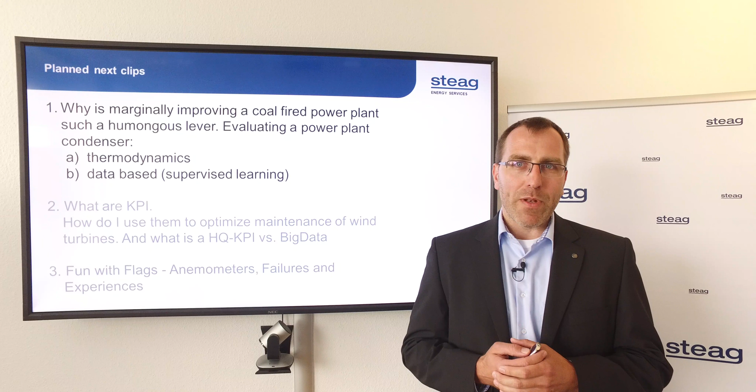Funny thing is, from the first episode, most feedback that I got was about the German humor. So I was trying to do some homework, was looking up some stuff, but there was nothing funny to share with you here right now. So the best one that I found was this one. Finally, the meaning behind the German flag. And that is a solution there. And that's the best joke that I found for you.

Now let's talk about the condenser. This is a small one. What is a condenser? It's a part in the power plant where the steam is condensated, so it can be reused for the cycle. We will see more data soon.

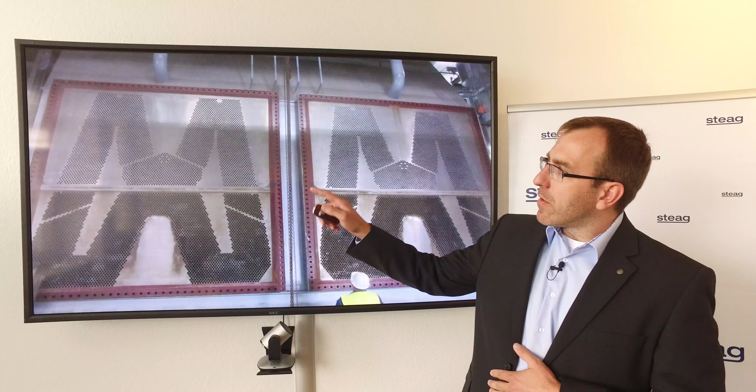So from the outside it looks like this. A bigger one from the inside looks like this. Those are holes, I hope you can see it here. The cold water goes through the holes and the steam comes from the top part. It looks like this. This is an animation that you can see on the STEAG website, where we can give you the link in the description below.

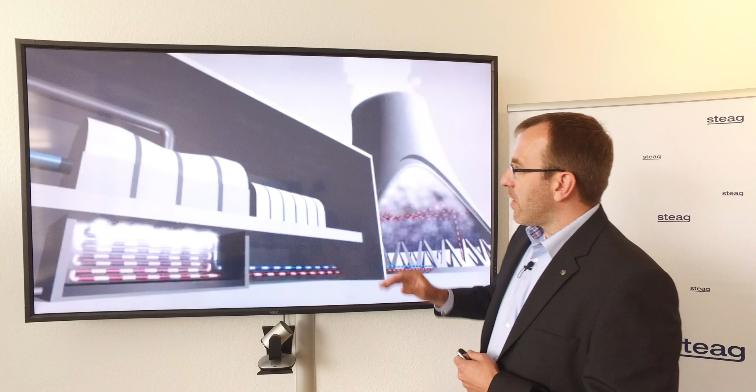So in the boiler part, we have the coal, we have the gas, whatever the power plant uses to make the steam in the piping system. Then the steam goes to the turbine system, high pressure, intermediate pressure and low pressure part. And finally the steam has to be condensated to go back to the cycle. Here we have the cold pipes. Why are they cold? They are cold because we have the cooling tower. And here a little bit of the water is evaporated, everything else is going back a little bit cooler. So we have steam, we have cold pipes, we have water, and that's it.

Why is it such an important part of the power plant? Yeah, because it has a huge impact on the efficiency of the overall plant, and it's difficult to monitor in the real world. So let's get started.

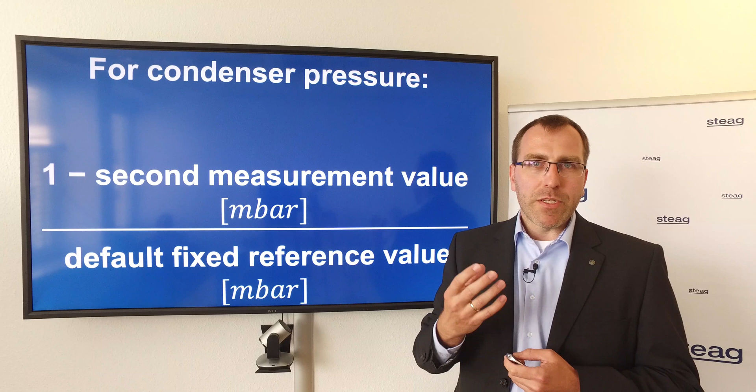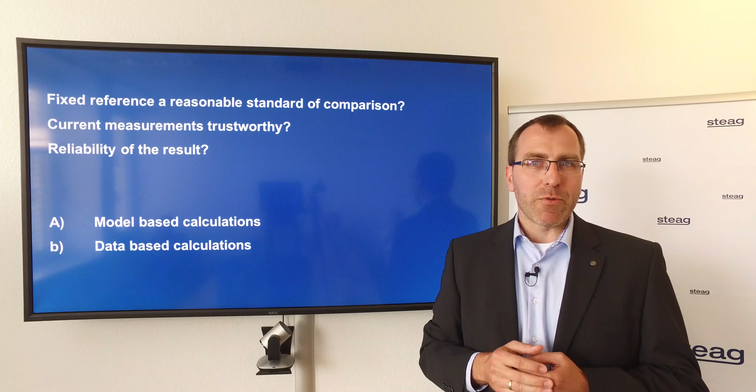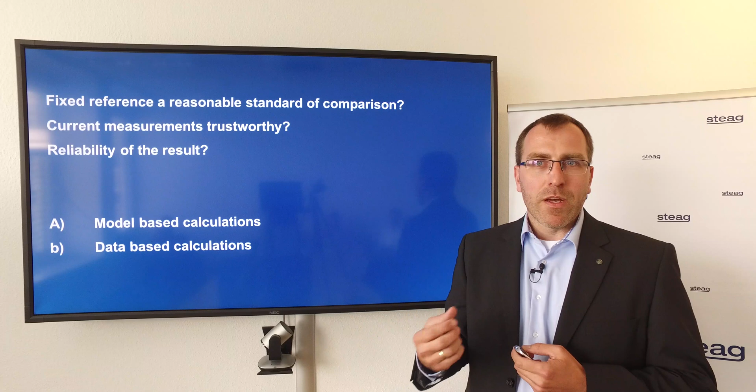Questions come up such as, why is that reference value a good comparison there? Is the measurement that I chose, is it trustworthy? And what is the reliability of the result in general? So now we have to go a little bit more into the detail. I love that, so let's do that now.

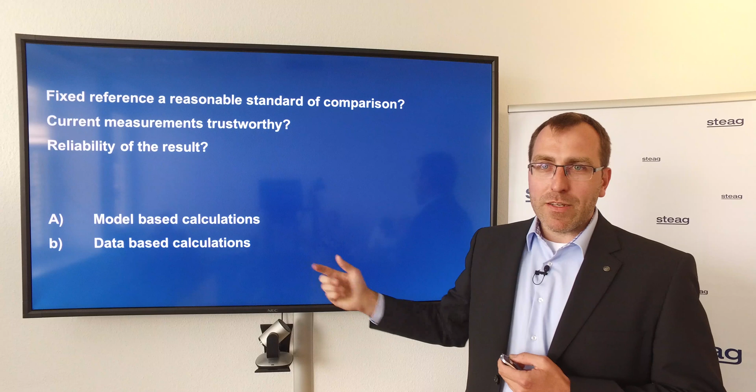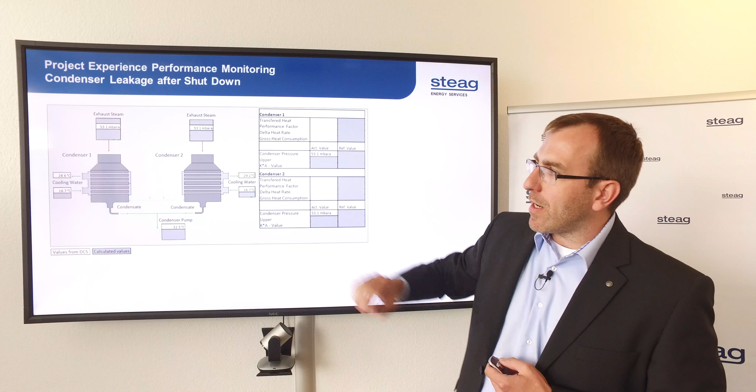First step, thermodynamical approach, and in the second part we have the data-based approach as well. So that is a view from our system. We have a picture of the kind here, and what we see in the white boxes are measurements taken from the control system. So right now we have everything on the screen, but it's very difficult to find out what it actually wants to tell us.

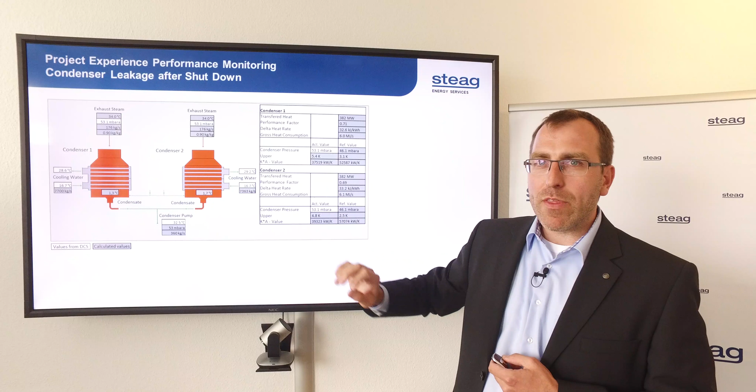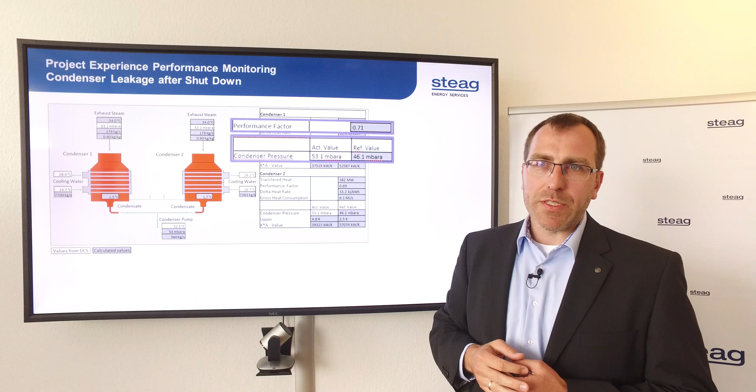Now we add the results from such a system, and biggest part is the color scheme. So red means something is wrong there. It's very easy to spot. And all those gray values are results from calculations, and they show us the context of the situation. We see performance factor, we see the condenser pressure as it is right now, and a current reference value what we should compare to. So that's even lower than the value that we chose in the beginning. The other one as well.

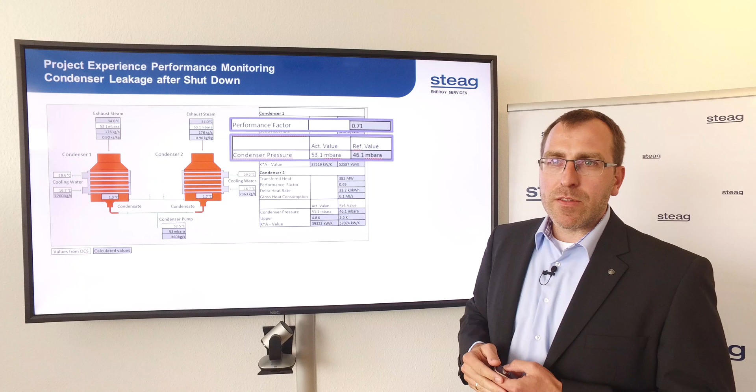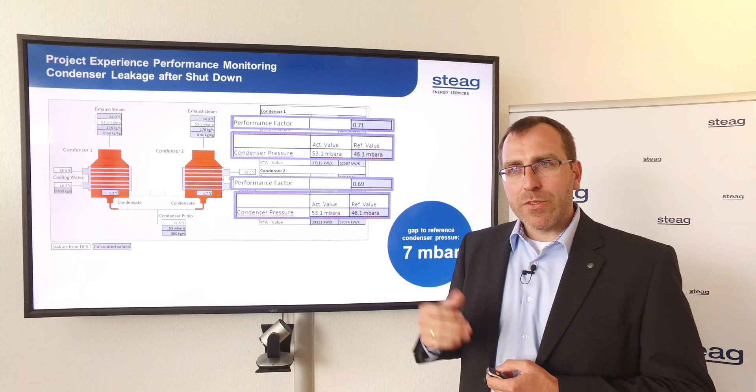So we have a small gap here of 7 millibars, and that is difficult to spot because measurements are fluctuating all the time anyways. With such a system it was easy to spot it immediately after a shutdown and a regular startup again. There was a small change, as we saw.

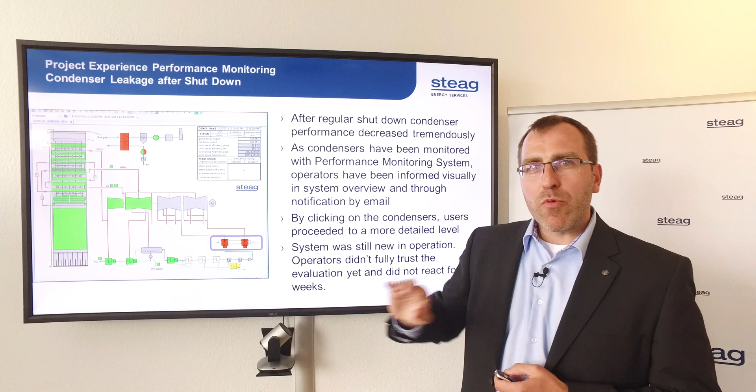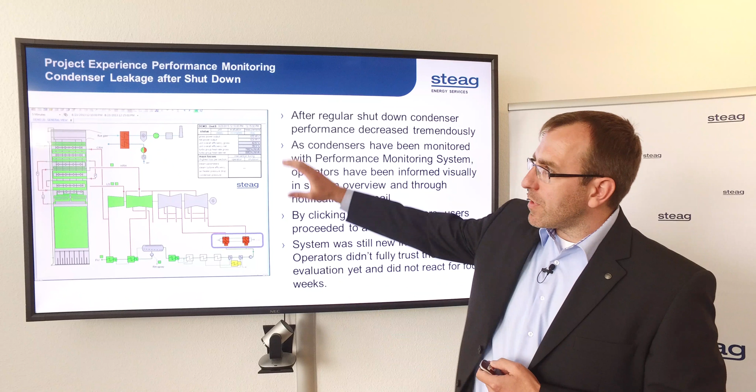Here was the picture, but the problem was it was a new system. It was not completely established yet, so the people saw it, but they didn't really completely react at this point in time. So the system gives the overview, and if you want to go into detail, you just click on it and you see the screen that we saw before.

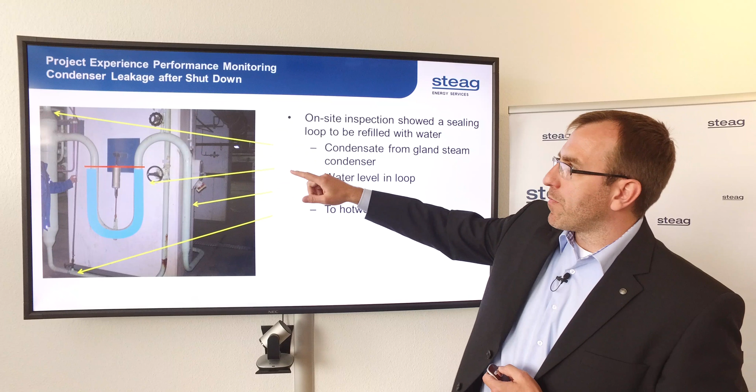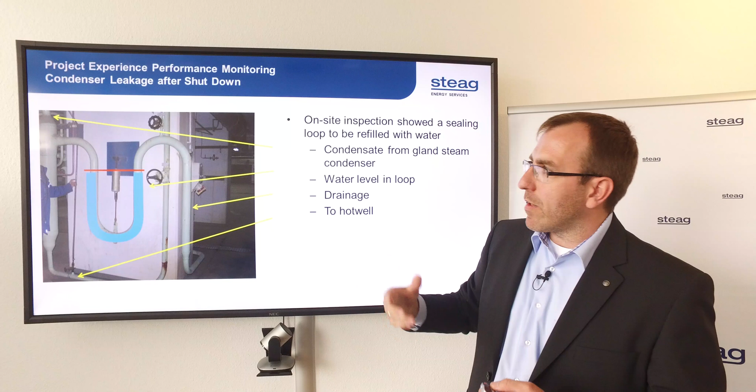What happened there? At the bottom of the condenser we have a loop, and the loop is supposed to be filled with water, which I marked in blue over there. It comes from the condenser and goes back to the condenser, and we have some emergency valve or high pressure valve, whatever you want to call it. Here it happened, after 20 years of operation, for the first time there was not enough water in there, so there was a small leakage, and the vacuum was a little bit higher than it was supposed to be.

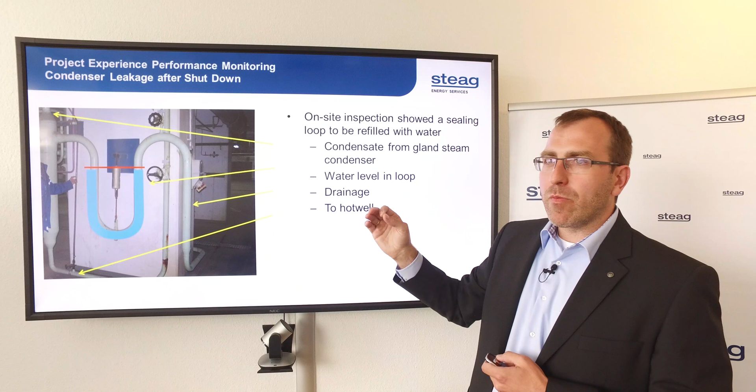The operators admitted they wouldn't see that for a couple of weeks. So we calculated the numbers for the two condensers together: it's like 12 megajoules per second that we are losing from the heat. That's heat you produce with coal that you don't really need for the same energy. For a 4 week period, that would be 150,000 euros. That's a nice big saving already, and a nice advantage for using those sophisticated approaches.

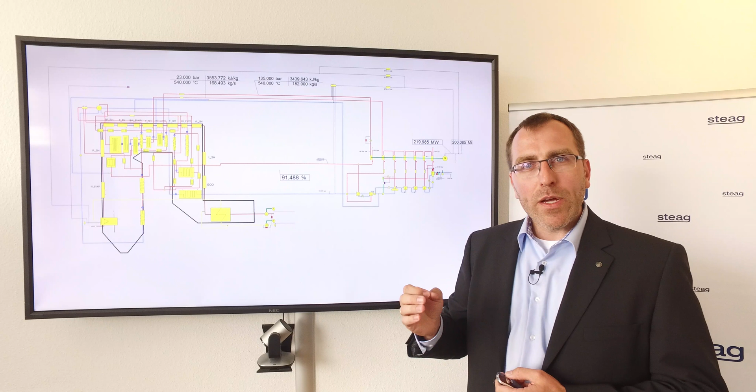Where do those numbers come from? Now we go into detail a little more. That is from our Ebsilon Professional. Here we have a scheme of a boiler, the water steam cycle, and to make it a little larger for you, here we have the condenser. We see this is just a picture, but the calculations are hidden behind it.

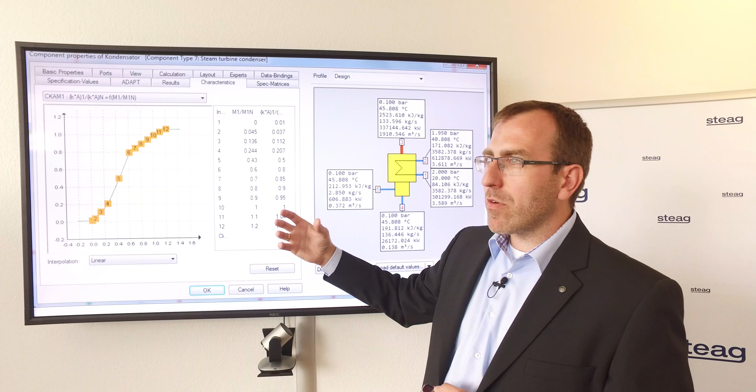It could look like this. So you have a strong calculation kernel. You choose the right calculation formulas, put in the data that you have. That's just to show you it's a very precise calculation, and therefore the evaluations are very helpful.

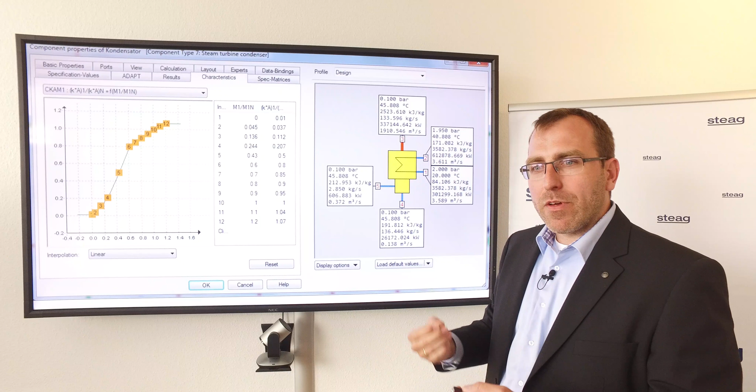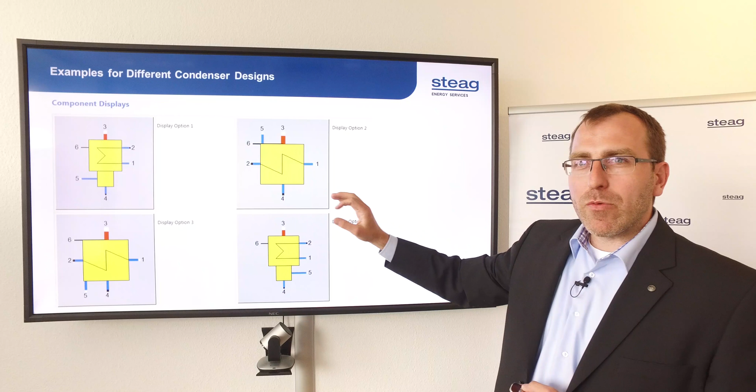Condensers come in different sizes, different kinds, so already here we see 4 different ways. What I want to show here is this is not rocket science. You can just go online and download the calculations - nothing restricted.

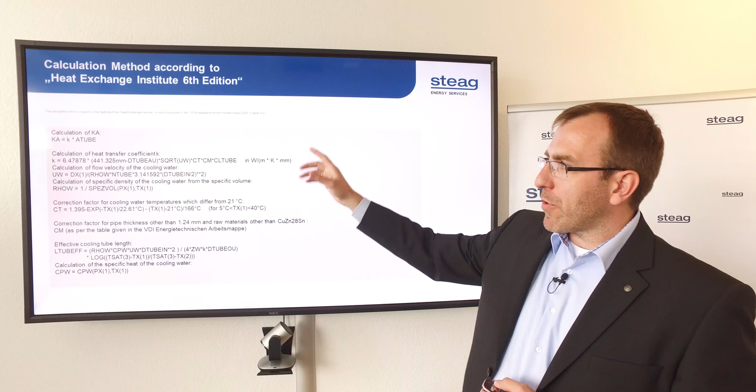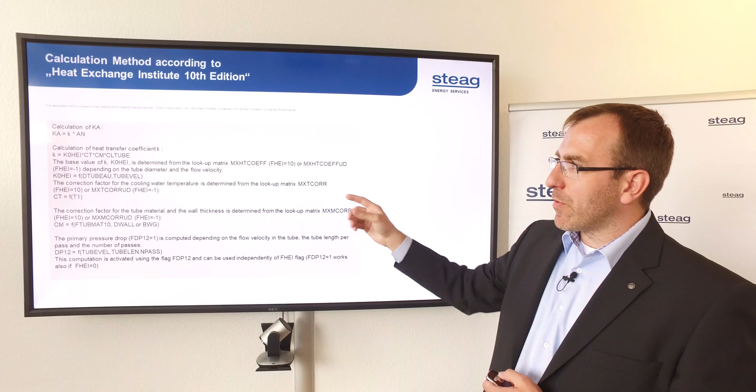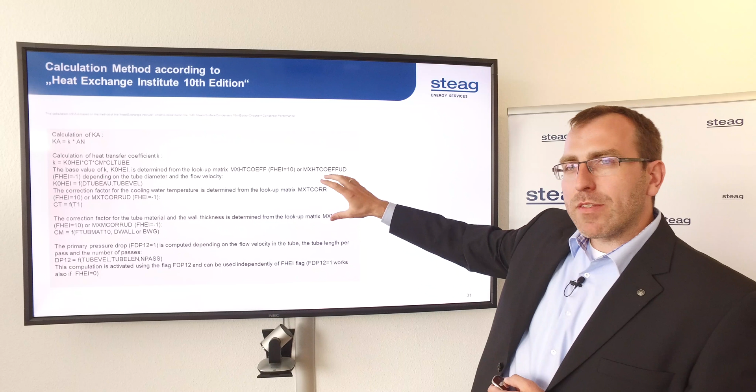But if you set up your calculations like this, and something changes, and some years later the same formula is now like this because knowledge changed over time - good luck if you are the one who is supposed to fix this calculation that maybe your colleague did 5 years ago. So I recommend using a tool that is more simple, more easy to use, with a graphical interface like the Ebsilon, and that is our calculation for the reference value in the online system, typically every 5 minutes.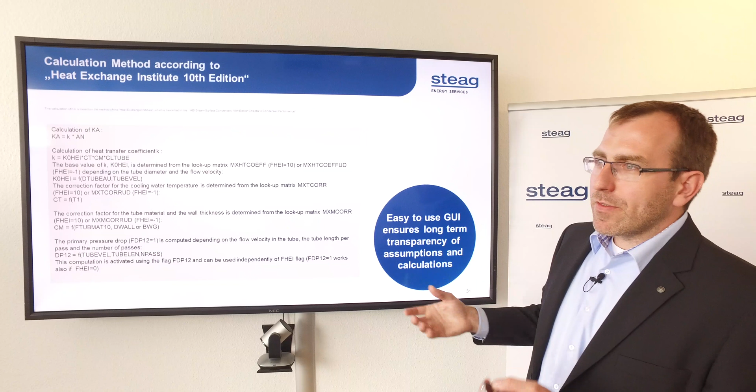If you have a nice interface, it's much more guaranteed that you will use it in the long term and that your effort really pays off. That's already the end of the first part of our short trip here to the condenser. We did the simple approach with the numbers immediately, and we saw a first principle model, a first principle approach, thermodynamical calculation with the EBSILON Professional.

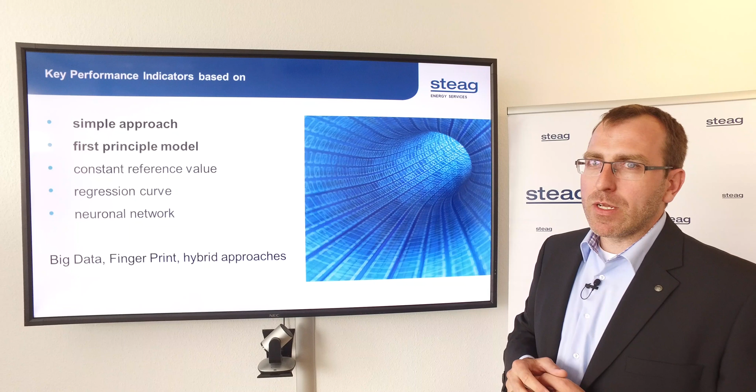Here we will make a short cut, a couple of minutes and a short drink for me. We will continue with the data-based approaches, and I hope you will stay with us.

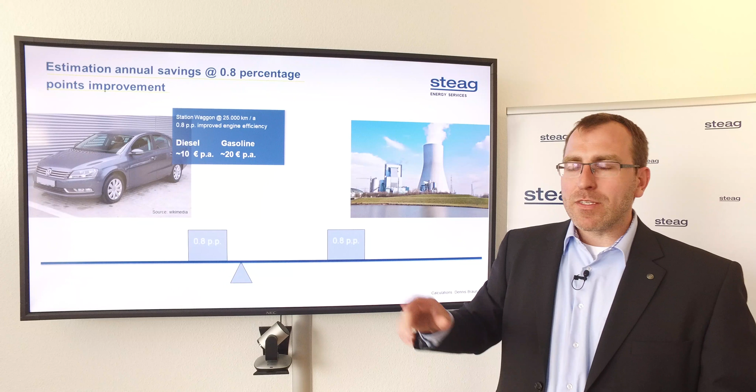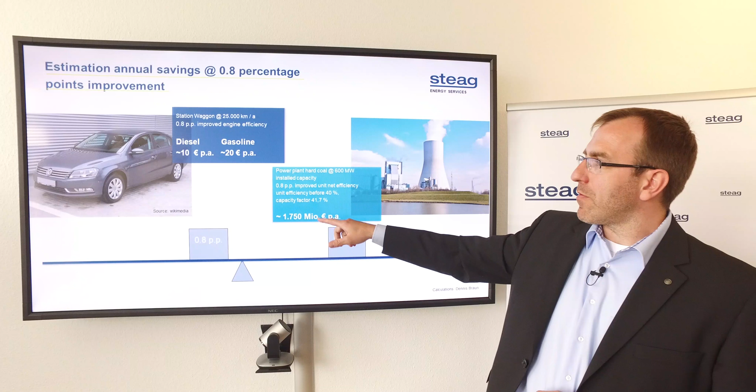We have an improvement of 0.8 percentage points, and out of a personal need I applied that to my car, and I applied that to the power plant world in comparison. So 0.8 percentage points on the engine make an annual saving of 10 euros for diesel engines, or about 20 euros per year for gasoline. The same 0.8 percentage points that we realized in a project we did in Germany some years ago added up to 1.75 million euros in savings, because the efficiency was improved, and that really is a huge lever that led to this saving.